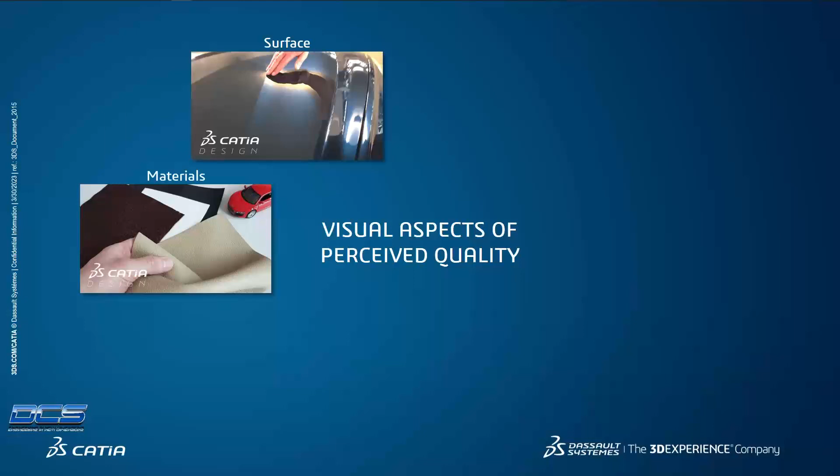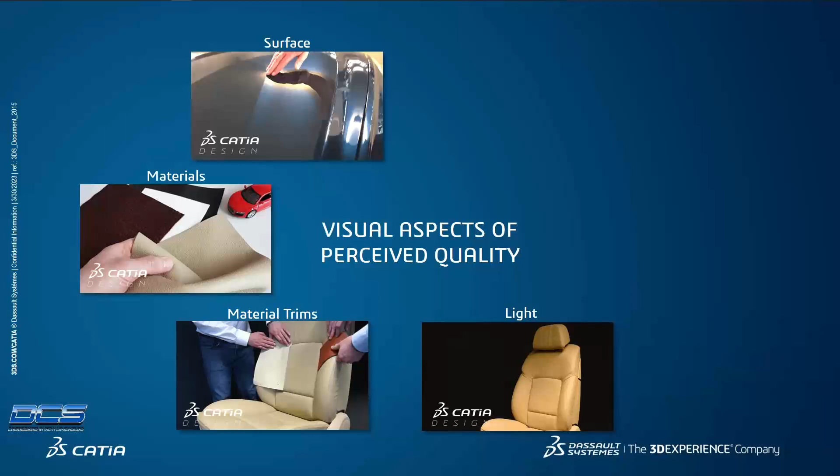The next factor is something, as you can see here, or probably you cannot see since it's all black, is light. With light, we as humans can see basically everything, like the surface and the materials. It also has a huge effect on the material appearance, so we will see later how that looks like.

And for sure, what we are talking about mostly today is gap and flush. As a designer, engineer, or stylist, you have a design intent, and the gap is a part of the design intent because you have to manufacture it, right? So that is also a very important part, which is in real life quite easy to investigate.

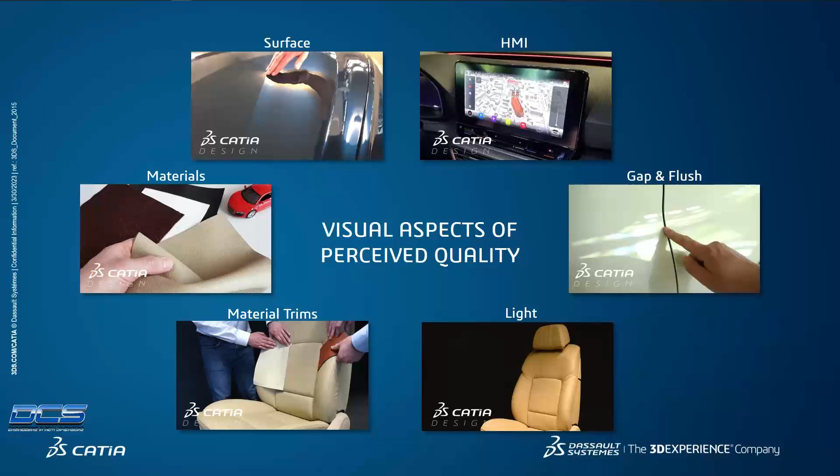A very new topic, or let's say one that becomes more and more interesting in today's cars, are HMIs, so-called human-machine interfaces—basically all our displays. They have two effects at the same time. They emit light, so they might change your appearance in the interior, and you can interact with HMIs, with the display itself. So there are two factors why they affect the perceived quality of your product.

Now comes the question: when do we want to make a perceived quality review? To answer that, we have to take a look at this generic product lifecycle template from design to mass production. Historically, perceived quality validations could only be performed on a physical prototype, and until that, there was no chance to do these things. So in design, style release, or technical release, there was no chance to enhance or do a perceived quality review. You might have done that first on your prototype, on your physical prototype, and you could be struggling to identify issues for the upcoming production.

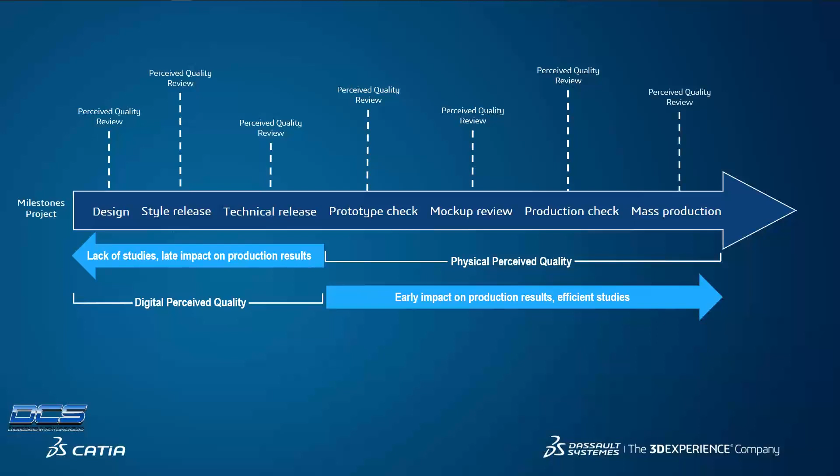But when you introduce a digital tool to review and make perceived quality reviews, then we can really find issues earlier, and these could affect all the later steps positively—we have a good impact and find issues earlier. That is quite good. So basically, that is also the answer to the question: when do we want to do a perceived quality review? We want to do it all along the process.

Within the 3D Experience platform, we are offering a solution to do this. We offer our designers all the tools to make a stunning design, we offer our engineers simulation tools to validate these designs or suggest new ideas, we offer collaboration tools to really collaborate between departments, and as I mentioned, since we want to experience perceived quality, we are offering experience tools on the 3D Experience platform.

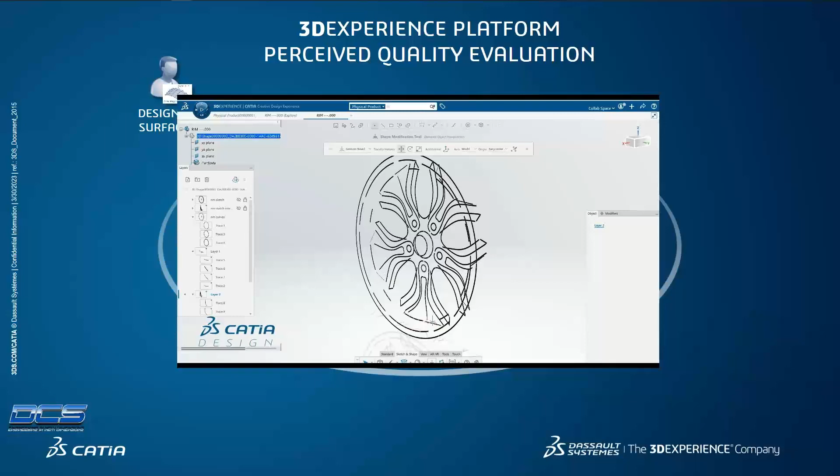Let me show you quickly to wrap up these things on the 3D Experience platform. We have tools for our creative designers to sketch and create surfaces out of that very easily in one tool. After you have the first surfaces, we can provide them to the next teams, the engineers or surface refinement teams, who then create the real Class A surfaces.

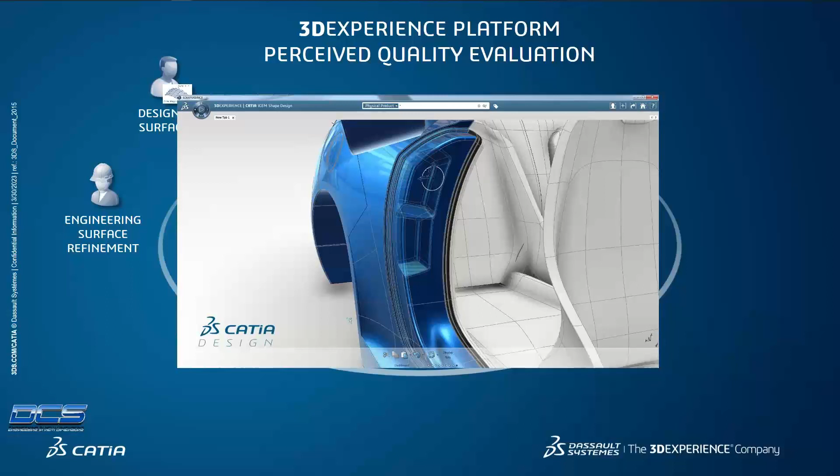Which you can use later on in the process for production. Until that point, we are just having surfaces, and surfaces is just one part. I told you that experience is very important for that. With the Visual Experience Designer and the embedded application CATIA Live Rendering, we are enabling high-end visualization on your managed CAD data.

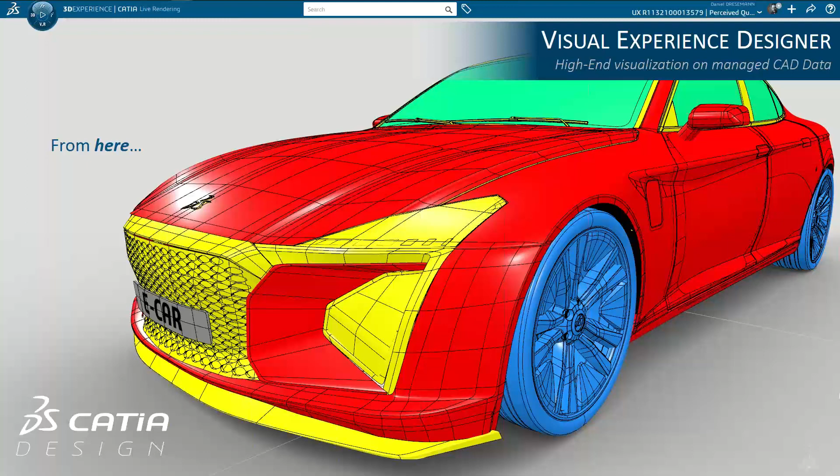So from here, we can go to here - that is a 3DEXPERIENCE. We have proper lights, proper materials, and a realistic environment around that, with really good and powerful render technology based on our Stellar renderer. Here you can see a picture done with the technology of global illumination.

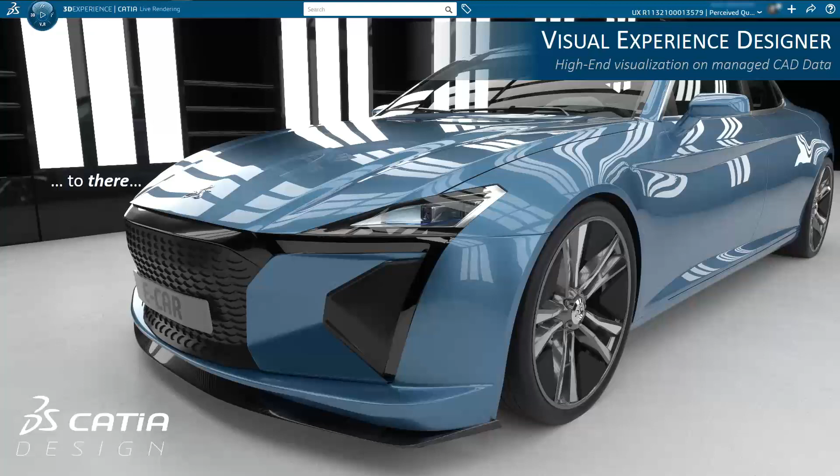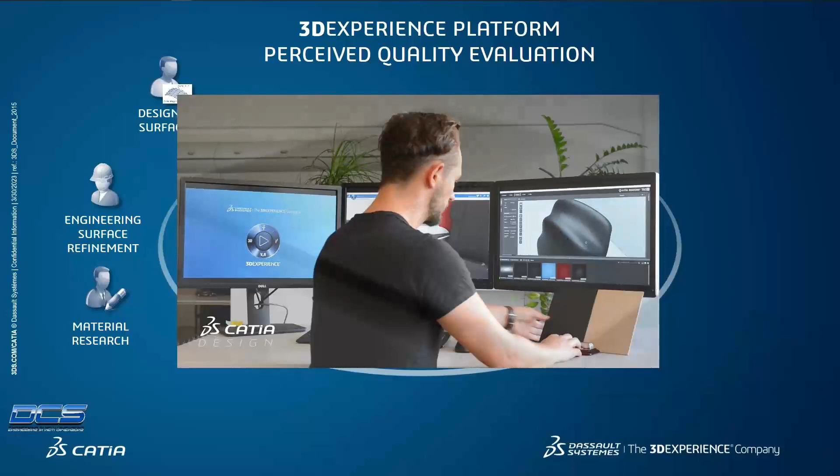So to get there, we have to make kind of a material research. For that, we can use real-life materials, scan them with our technology partner X-Rite, and they can produce a really physically correct scan, which we can then apply to the surface, and validate these results virtually based on our Stellar physically correct renderer.

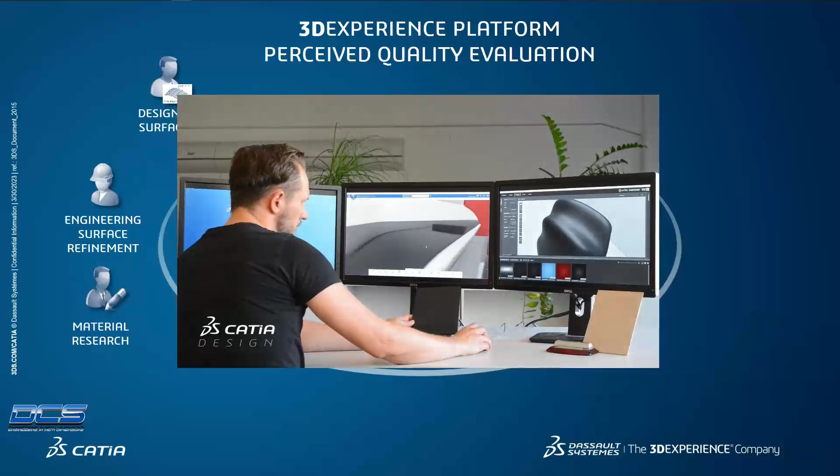So we have still the same connection here. For sure, what we can also do is, in the material research part, we can also visualize procedural materials like substances.

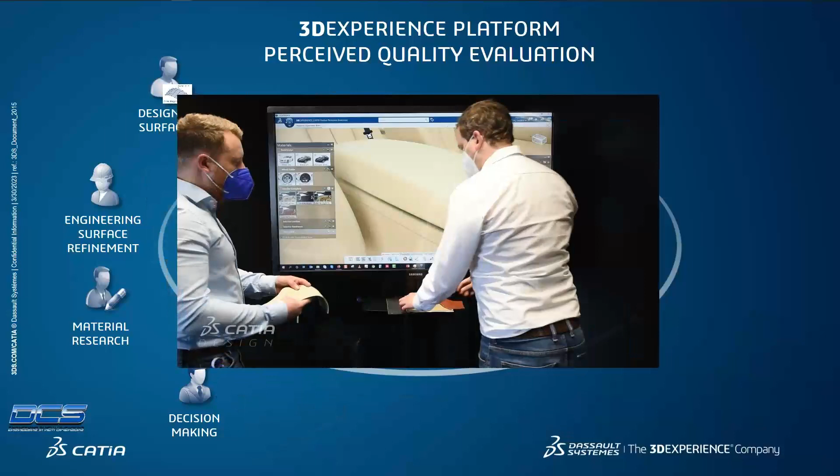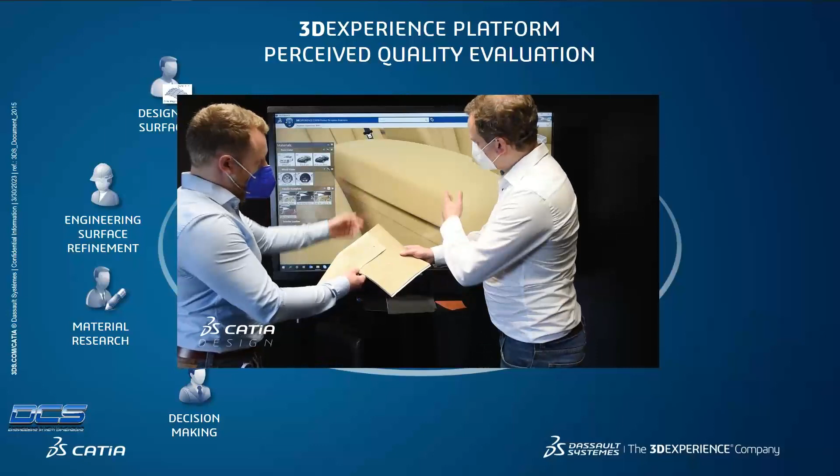That leads me to the part that we have now a few materials available, so now we need to make a decision. If you remember the example from before, on our real life example, we tried to put our reference materials here in real life on our product. We had just small patches, and now we can really put them on the whole product and really evaluate and make decisions easier.

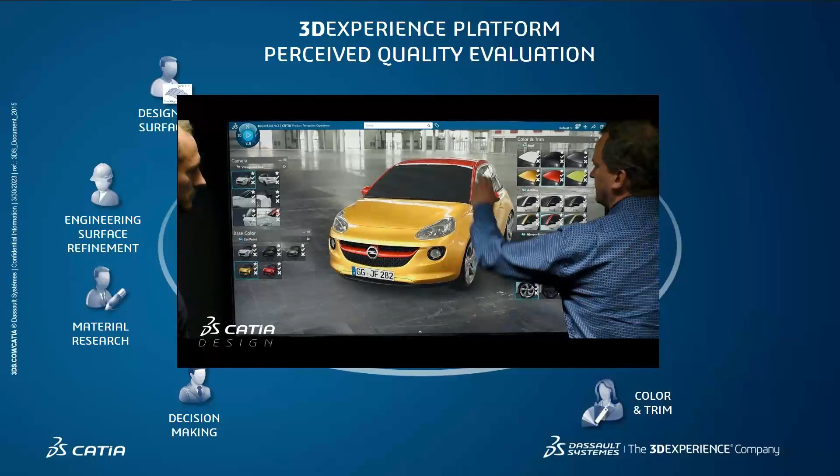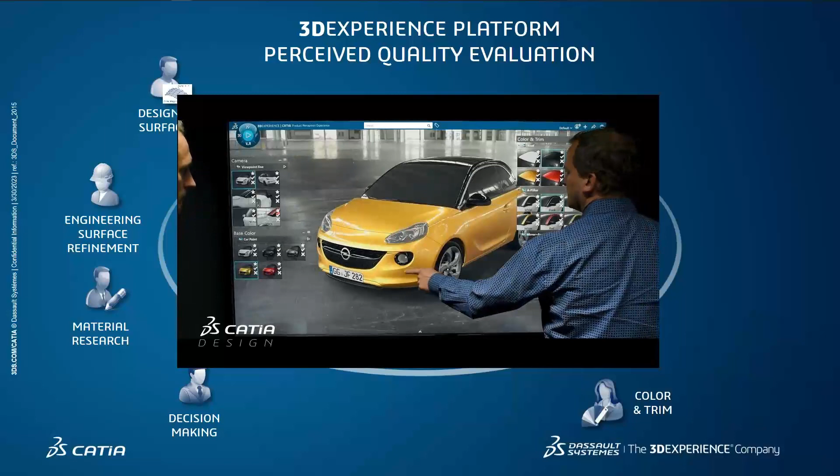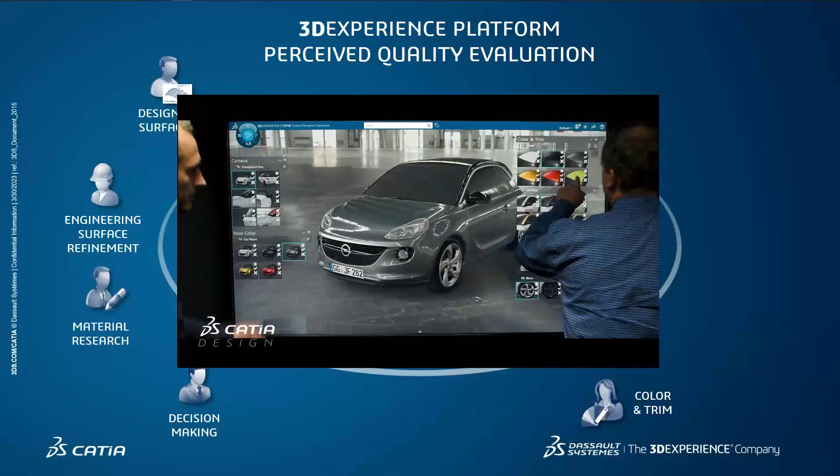When we have done this part, we gather all the other materials, 3D surfaces, materials, and environment variants, and put them together in a tool called Product Perception Experience, which enables us in a very intuitive way to try different trims and packages. So you can see we can collaborate together on the same data, talk about different trims, and save them for later reviews.

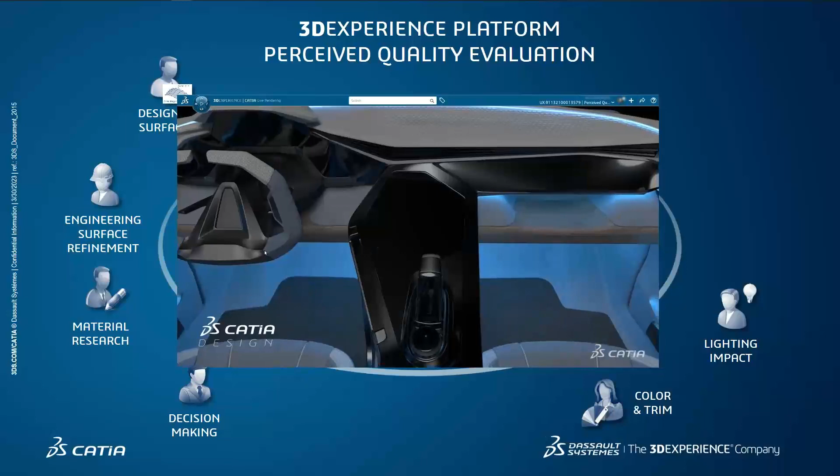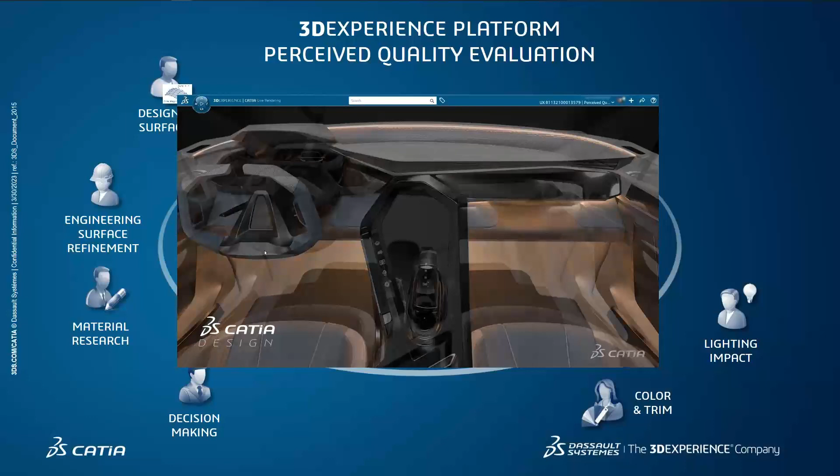I mentioned before the light factor is a very critical one. As you see here, when the mood light changes, the material appearance also changes on the product. That's not only true for interior light, it's also true for exterior light, meaning all our ambiences, whether there's sun, a night session, rainy weather, or whatever - everything affects our visual perceived quality here.

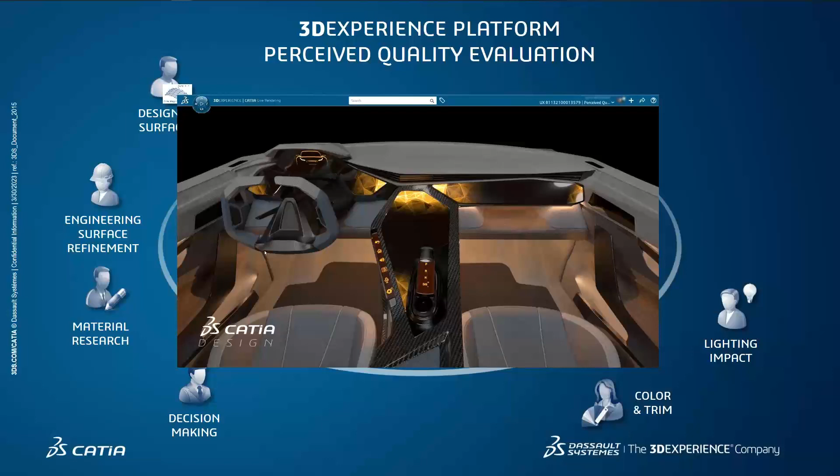Another very important factor is these displays you can see now here. These are also getting more and more space in our interior designs, and they can also affect, with the light they emit, the visual appearance of our interior.

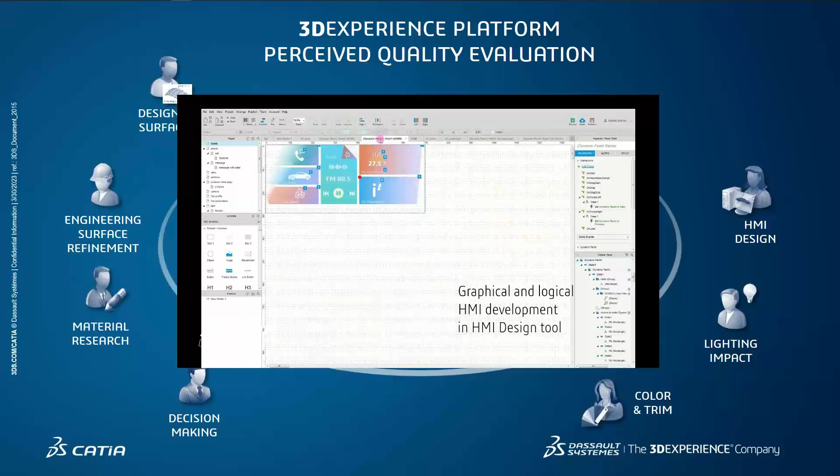But that is not the only thing - there's also the interaction. You have an HMI designer prototyping in their dedicated tool an HMI interface, or more or less the content of a display. As you can see here, it is an HTML page.

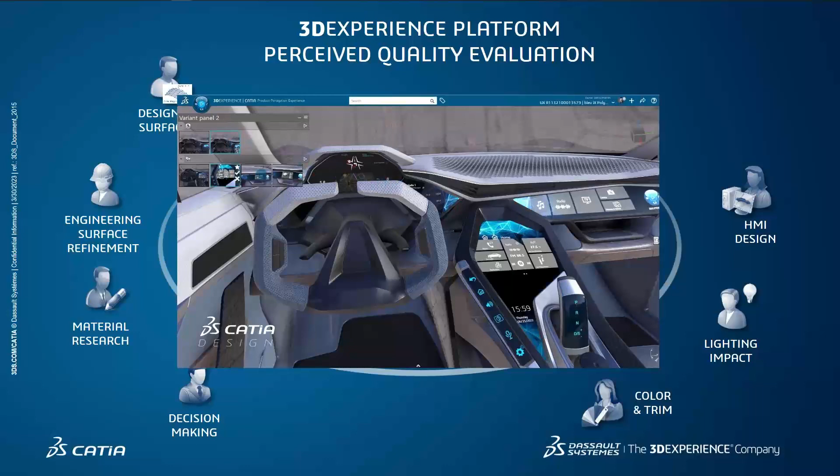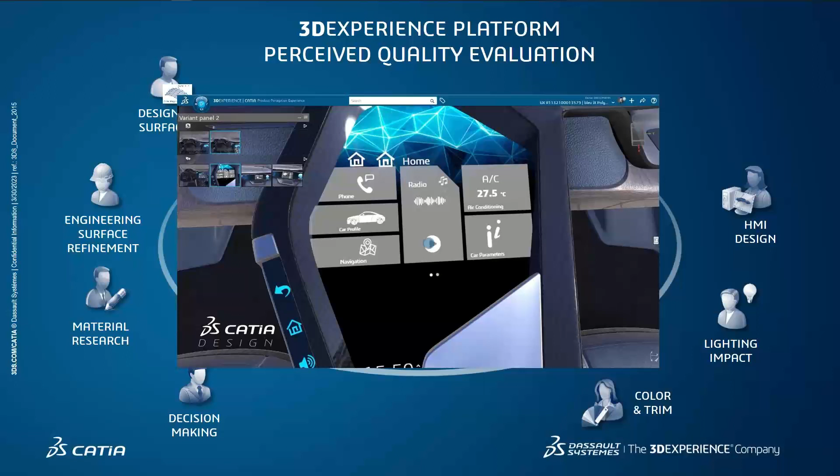We can interact in there, and now we can also include that in our whole 3D scene, meaning we have the proper lights again, the materials around it, and you really can get the feeling of whether the whole content of your HMI fits into your product and its context. You can also interact with it in 3D, which gives us a quite complete check for our perceived quality review here.

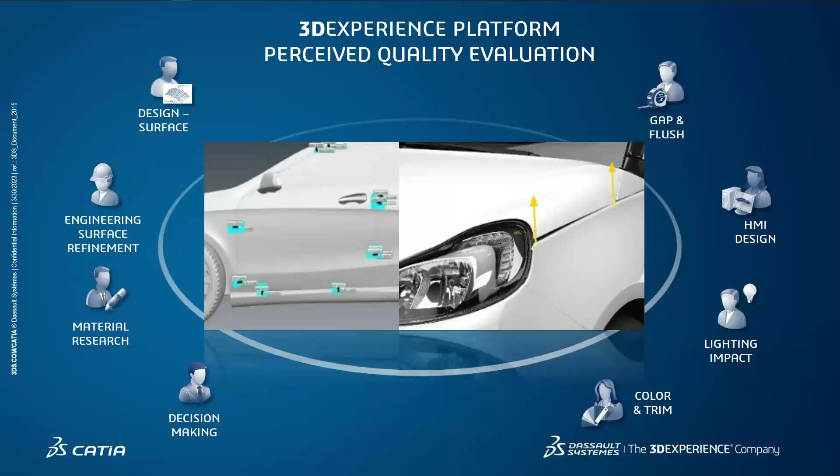As a last step, and now I want to really focus on Gap and Flush, because this talk is about Gap and Flush - that was more or less an introduction.

We are coming to the part where collaboration is really mandatory. This might be the first time where designers, engineers, manufacturing, planning people, and simulation departments come together and meet in front of the car to discuss it. On the left, the designers had an intent for the surface and material, but as soon as it comes to manufacturing, there has to be a gap because it could not be built in one part. Now the gap is part of the design intent. Another good example is on the right, where multiple materials come together and have to be separated by the gap. So again, the gap becomes part of this material split and the designer's material intention.

In the following, I have some more examples where we can see how different materials can affect the visual appearance of a gap. There might be a color where the gap appears more noticeable, and other colors where it appears less noticeable.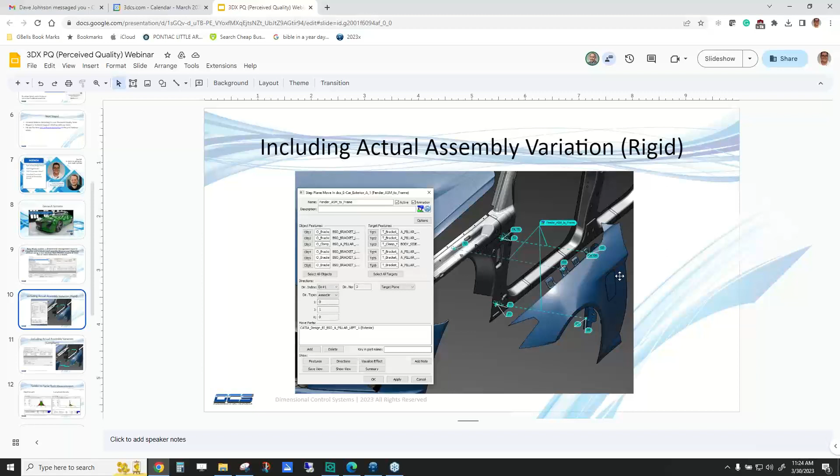But when you do something like that, you're going to get a lot of variation up front. And we know that fenders are flexible and have more than just a 3-2-1 locating system. So then we enhance the software with Compliant Modeler, which allows you to over constrain the part. You'll have your original 3-2-1 locators, and then you can clamp it and attach it at additional locators here.

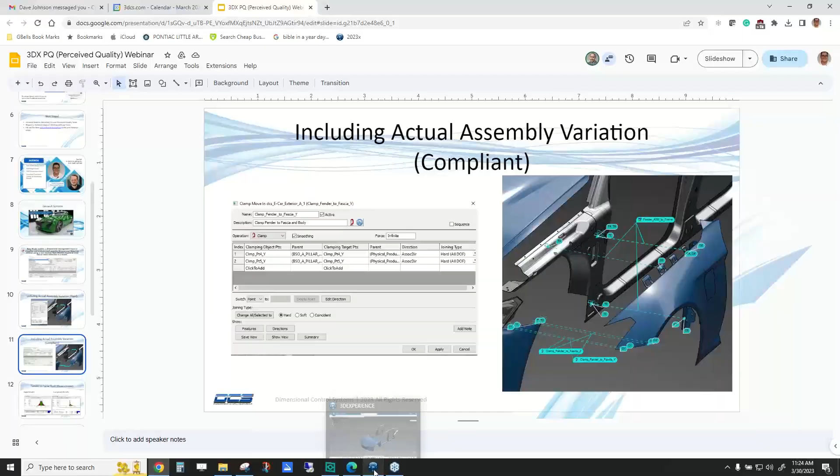So if I jump over to 3D Experience, this is a minimized version of the model. As I mentioned, you can see this model has moves in it and it has tolerances in it, but we're not going to talk about that. We're going to just talk about measurements.

So here you can see I'm measuring the Y variation, Z variation at the fender, and I'm measuring the traditional gap between the fender and the hood. You can have any of the measurements that you write around the vehicle.

And once those measurements are written, if I go into this measurement here, this is the spec limit. This is what we're trying to validate from a full model - that the design is 3 millimeters. We want to know if it varies within plus or minus 1, is that good enough? Will it look good enough? Is this what we want to accept as our spec limit, so that we can then finish the design, analyze it, and see if we can meet that spec?

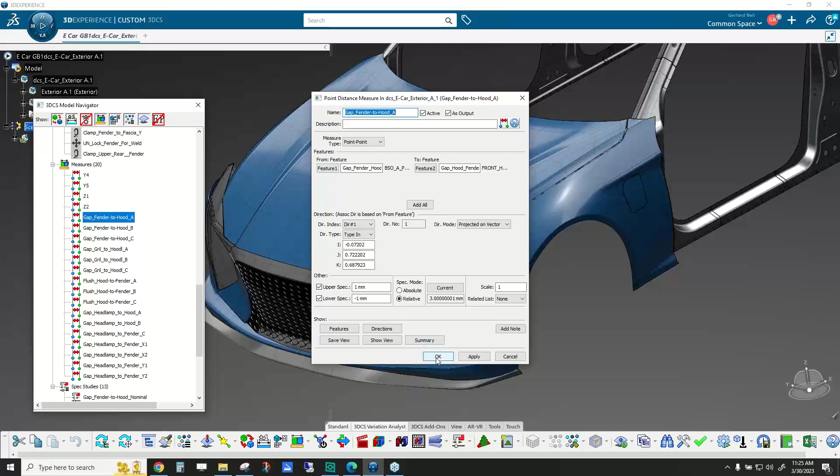So with that, you would then write spec studies. And if I go into a spec study here, this allows you to pick any of your measurements and put them down in this list. This is a gap fender to hood minimum. So you can see the nominal is 3 millimeters, and we want to see what it looks like at the lower spec limit, which is going to be 2 millimeters.

And you can either set it to your lower spec limit, your upper spec limit, nominal, or specify any value. As I click through here, you can see, okay, this is a fender gap max, so now it's set to the upper spec limit, and we want to push the gap to 4 millimeters. All of these over here are spec studies, and you can have an A gap and a V gap.

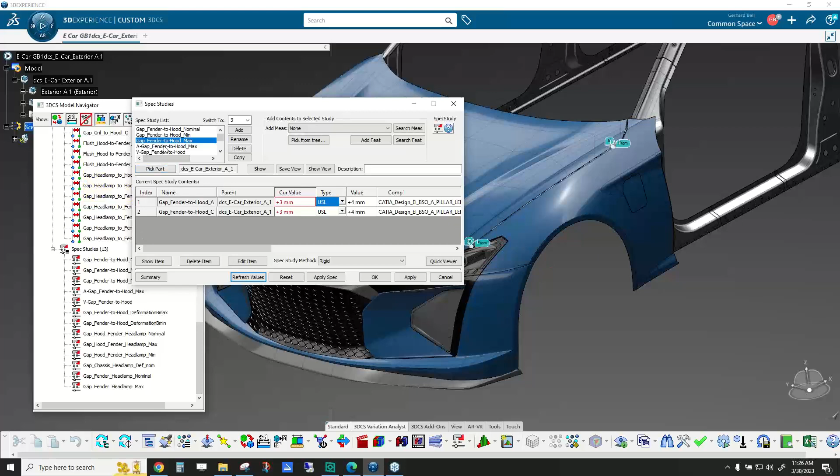And once you have all these spec studies, if I zoom in here and go to Quick Viewer, I can just come here and click through, and you can see the gap is opening, the gap is closing. This is an A gap. This is a V gap.

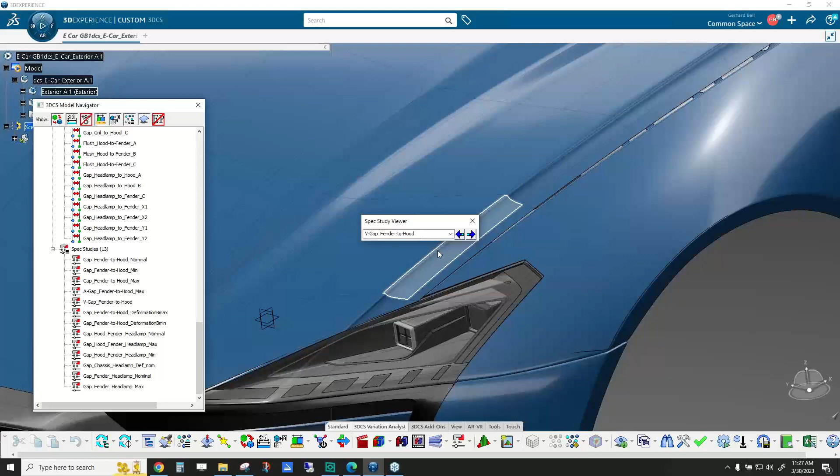So you can quickly pass through any of your settings here to get a visual. And then there's more spec studies in here where you can see this is gap fender to hood deformation, where we opened up the gap in the middle and we closed the gap at the end. And so the idea is...

Without the design being complete, you can put these panels into any position and visually look at it and say yes or no, to establish the confirmation of what your actual measurement specs should be.

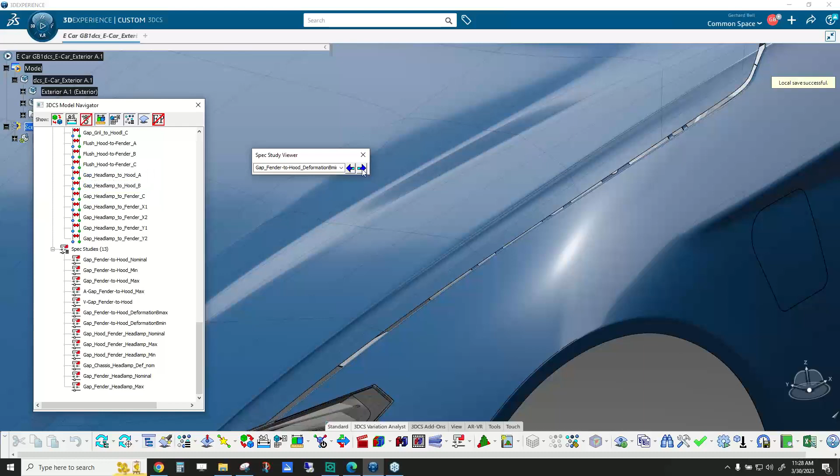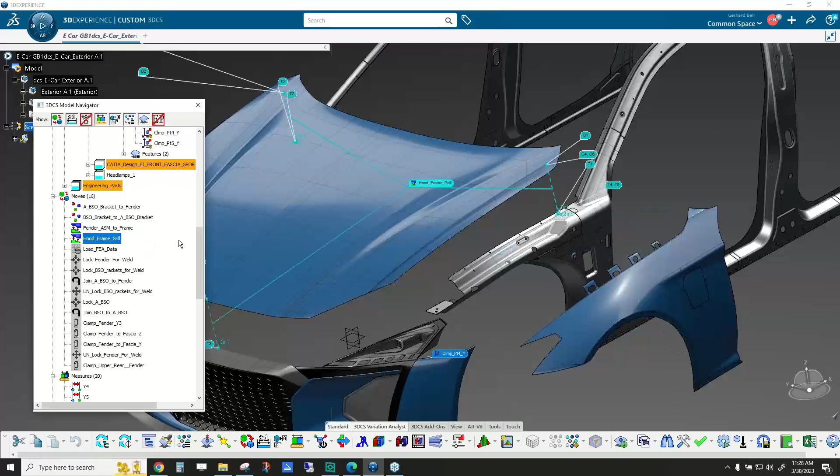Once those measurement specs are set, I can now separate this model, because this does have moves to define it, and there's that 3-2-1 move that was locating the fender. Of course, there's a move for the hood as well. Then I can go ahead and build this and deviate it.

So now we can pick up the variation from the actual part tolerances and the build specifications. This is a rigid body model. So if I go ahead and build this, we're going to look at this Y variation up here on the fender, and if I run a quick analysis...

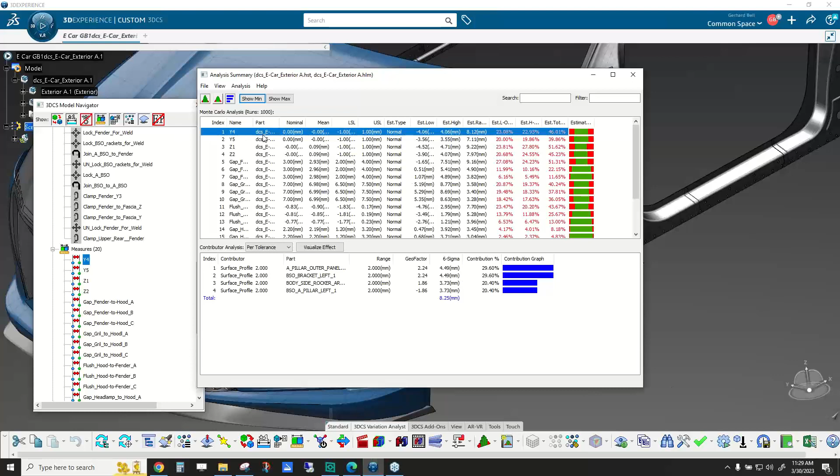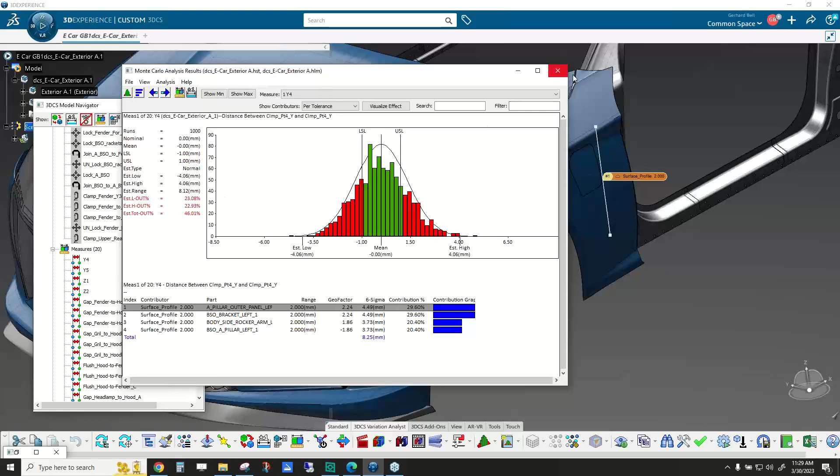And we look at that measurement, so you can see locating this fender based on points back here and one point in the middle. I'm projecting out, I have a high geofactor, and that fascia, or the fender to fascia fit, is quite bad - 8.12 millimeters. So we can have a single model set with multiple settings.

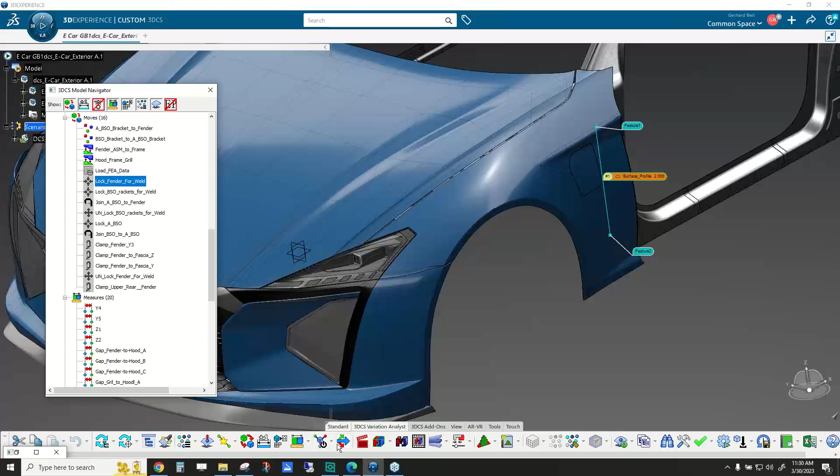Here's the compliant modeler. In the compliant modeler, you have to load some FEA data so we know how this part's going to deform according to its material properties and where it's all attached. And if I use our model variants, I can just quickly say, hey, I want to switch this over to a compliant model by applying this model variant. Now you can see it automatically turned all these moves on. And because this is a compliant model, we have to - let me separate this real quick.

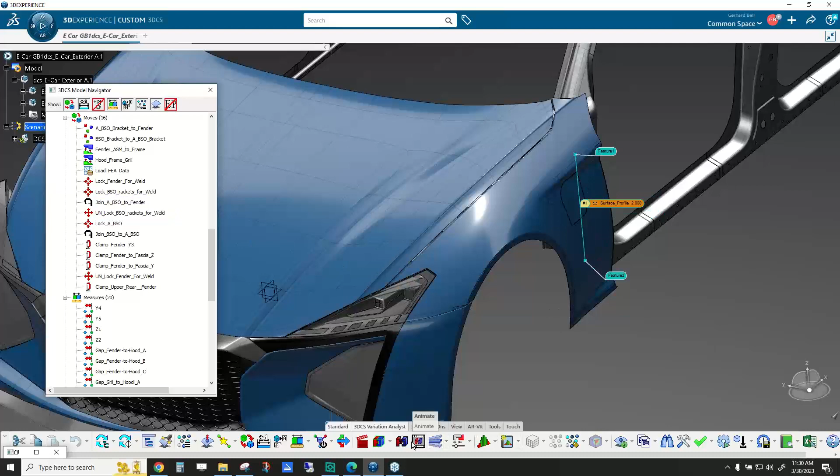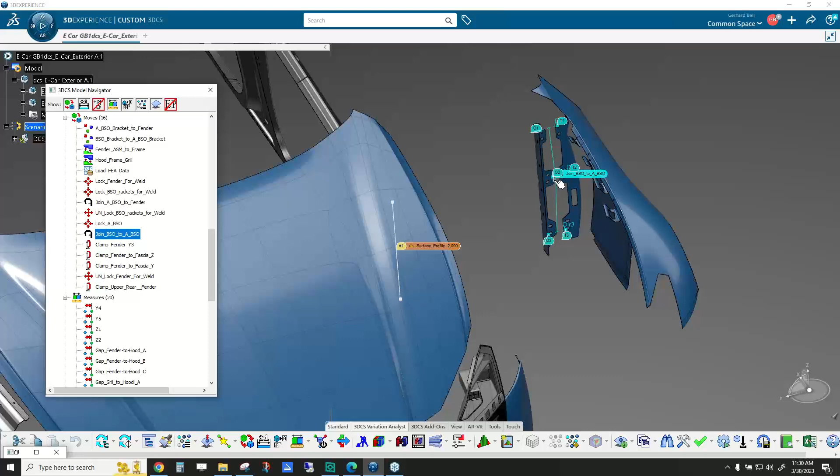We have some components here that are also compliant. So we have a little more work to do because we have to join these parts together and then join those parts to this part so that the stiffness of all three becomes one. That's what these extra moves are, where we're holding the part so we can weld this piece to this piece. And here we're welding these two pieces together. Now the stiffness of all three of those are combined.

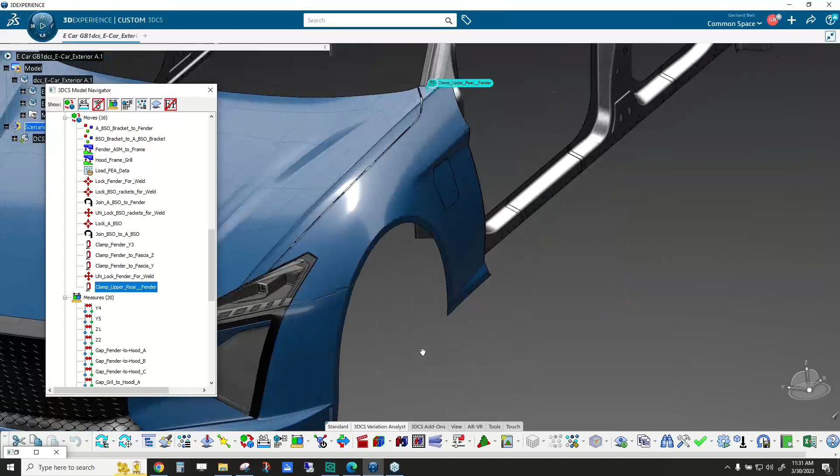And then I can start clamping at all of the attachment points. We even simulated an attachment point up there. So with that, if I build this and zoom in here, just watch this corner when I hit deviate. It's a little slow, but this corner is twisting in and out as I'm clamping the fender up here. So forces up here are being projected in here, and you can see how it's deforming the fender.

If I go ahead and run this, this is going to take a little bit longer than the rigid body. A little bit longer.

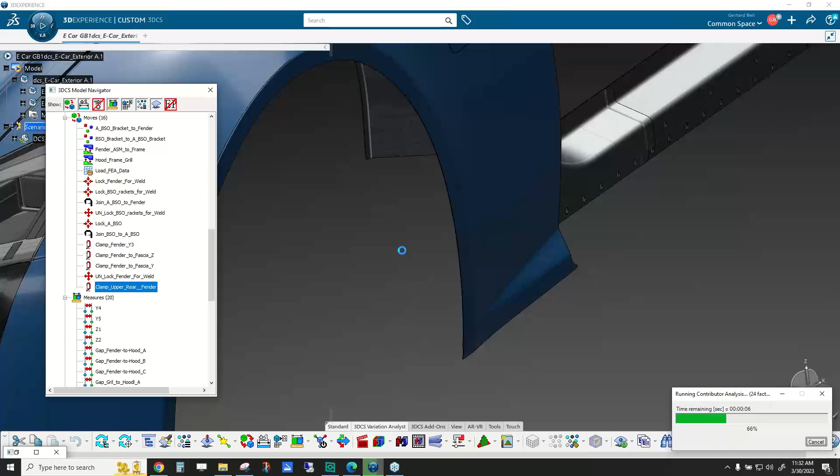Now if I go back to that Y measurement, fender to fascia, you can see it's zero because we clamped it back to the fascia. So we can take a model and analyze it from a rigid body standpoint. We can analyze it from a compliant standpoint, over-constrained parts. And we can put the visualization on it and see how this is going to look in real life with the variation.

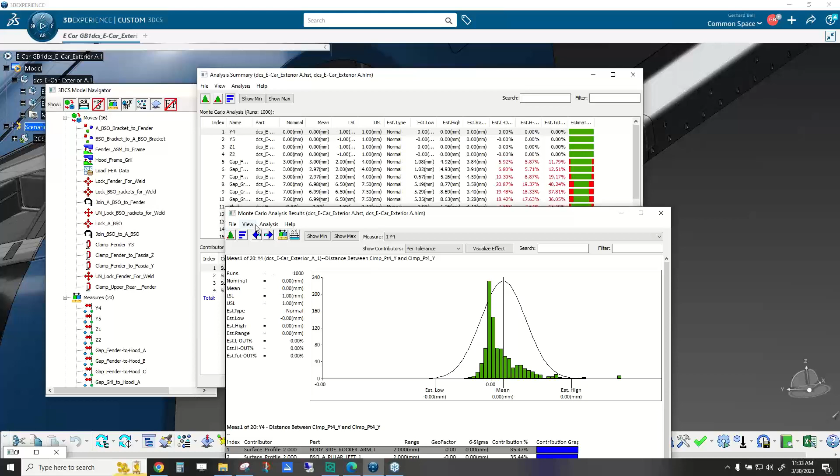So Daniel's going to show you that if I go back into one of these spec studies.

You can set your spec study to its nominal design gap, its upper and lower specifications, or if you run the analysis, then you set it to the specified amount. What did the analysis tell you? That way you can look at your design and say, okay, this is what we're going to get from our assembly method and our component part tolerances. What does it look like? Is it acceptable? Is it not acceptable?

And that's where Daniel's going to go back and show you the variation with the advanced visualization. And with that, I will hand it back to Daniel.

Thanks, Gary. Let me switch on my camera here again so that you can see me. Ben, do you want to do one of those polls, or should I go through that and show my screen?

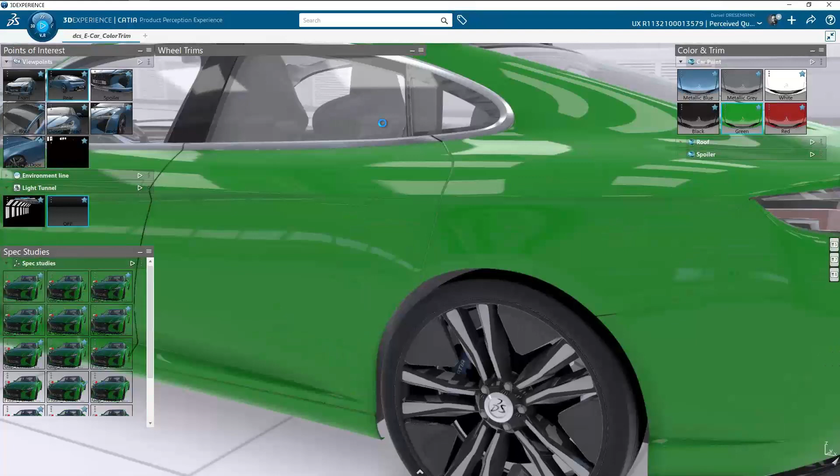So for example, you can switch colors here quite easily. You can look at the spec studies here, what we are doing right now. You have predefined cameras, like I mentioned before, and we are here in the CATIA product perception experience application. So just that you know in which application we are at the moment.

Let's directly jump into the topic of spec studies and show some spec studies. So here we are, I have highlighted a few. There are all spec studies from Gary in here, I'm just able to import that. But to get a little bit better overview, I'm showing some of my favorite spec studies to get you the best feedback here.

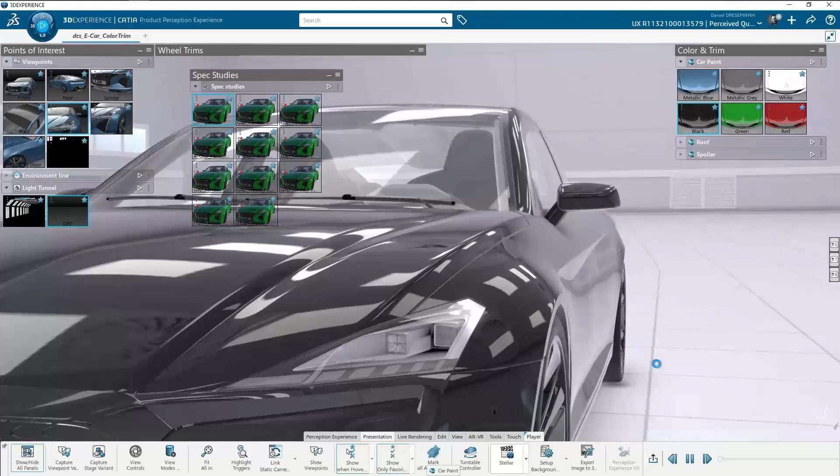You already see that is our real-time visualization, which is already quite good. But in terms of reflections and shadow calculation, we need to switch on our global illumination renderer, which is here, Stellar. That is now active.

And we still have the capability to move a little bit. You see that the performance has reduced a bit, but it's still quite nice. That's because what I'm using right now is our little cluster running with our distributed Stellar commands. So Stellar is not only running locally, it is also running over the network.

And the cool thing is you can linearly scale this technology up. So we're using 8 graphic cards at the same time right now, and you can use 16, 64, up to 4,000 graphic cards. Then you really have more or less a real-time global illumination review, which helps elevate this process better.

So now you really get the idea that we have different reflections. We can zoom in here a little bit. Just let's zoom in on this one, to get a bit better view of the reflections here from the lamps on top of our environment. A little bit to that side, nice.

Okay, that's better. So that is now our nominal build situation, and let's enable, for example, first maximum. So that's really a subtle and light movement. As we have seen in Gary's presentation, these movements are very, very little. But as a designer, I don't want a lot of changes, right? So this should be checked quite easily.

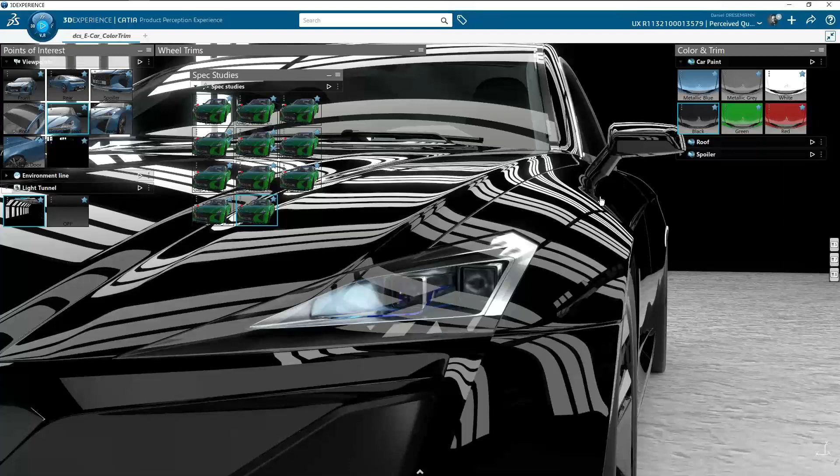But let's change the environment very quickly here. We have a kind of light tunnel, which gives us a bit more reflections and more information about where these reflection changes have an impact. Let's zoom and navigate around that, and now look from a different angle on these parts. So now we can really see nice reflections, these reflection lines and highlight lines.

So this is how it should look basically. Let's turn it around a little bit so we can see it, and let's have a look again at this spec study and really see the difference, what happens here in the front and also here in the back.

Still, these movements are very subtle, and from the spec studies we can mention them. These are still, in terms of reflections, good, so we can flag them for now. But we keep them open and go back to the default value here.

First of all, we want to see how the rigid movements are working. Gary already showed that these are probably not very good, but let's have a look here also in terms of visualization.

What effects does this have? We really see a lot of changes in the reflection, a lot of movements from the fender, something which is really not working from the designer's perspective. The cool thing is you can sit together as a designer and engineer and talk about the same understanding, visually seeing the impact of these changes. So I think we can agree the rigid spec studies are not the ones we are really interested in.

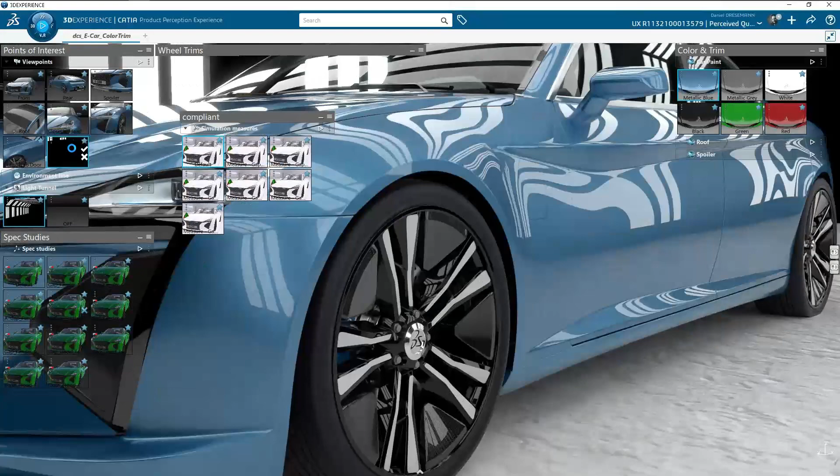Let's take this metallic color, for example, in the first place, and have a look here with a predefined camera, which is cool because I already took a look at a specific highlight I want to draw your attention to, which is here at the place where this little opening for the charger is. So let's have a look how the compliant model has an effect.

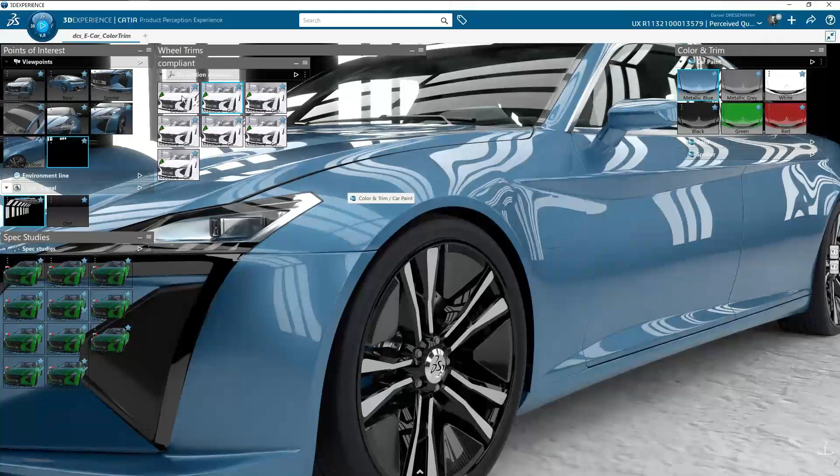This is actually here, probably we will move that up a little bit so you can see also the gap. It's a little bit better like this. But you see that we really have a difference here, and this is the key point where we really see the difference in terms of reflections.

We have reflection changes. As Gary mentioned, we also have a flush measurement now we need to take care of at the bottom of this fender. We also see other materials looking through here, which means we really need another, better solution for our assembly process. But this looks good because we fixed these two measurements between the fender and the fascia.

But if we take a look here at these results, we see that we have to put a little more work into our solution to find the best approach for the assembly process of this fender. And that, in my mind, is how perceived quality, visual perceived quality, can help you see the difference faster and easier, because you really have extreme reflection changes on your fender.

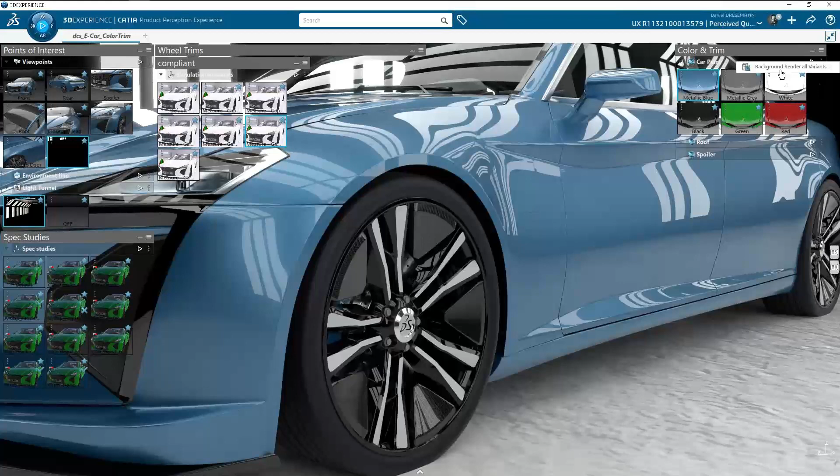What you can do as well, just to show quickly, is, for example, if you find a certain gap you want to show to your colleagues in all these six colors, we can use our so-called background render all variants. Click on that and just click OK.

So in the background now the rendering will be processed while I show you something else, and that will pop up in a second. In the meantime, after it has finished, I can show you these nice pictures from that view, and you can share them. You can see right away the software is going through all the colors now.

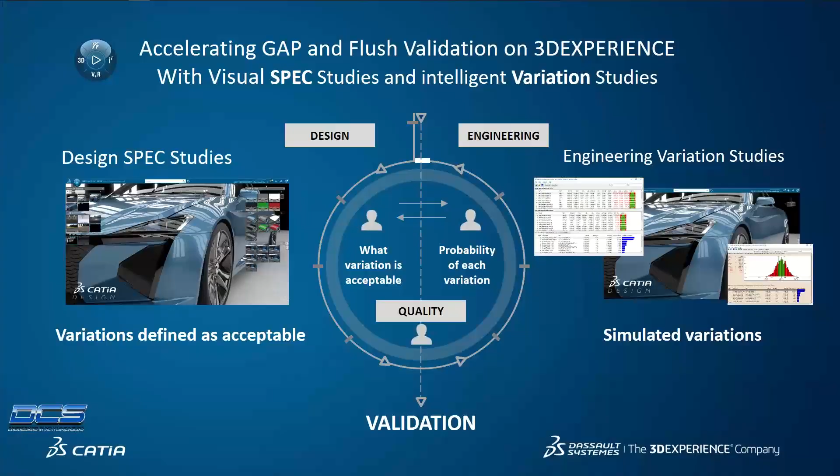And rendering it basically. So coming back to these things here, let me just jump through this one—oh sorry, jumped too far. I want to show you this: you not only can do this by yourself, preparing everything, because I wanted to really show you the high-end quality here.

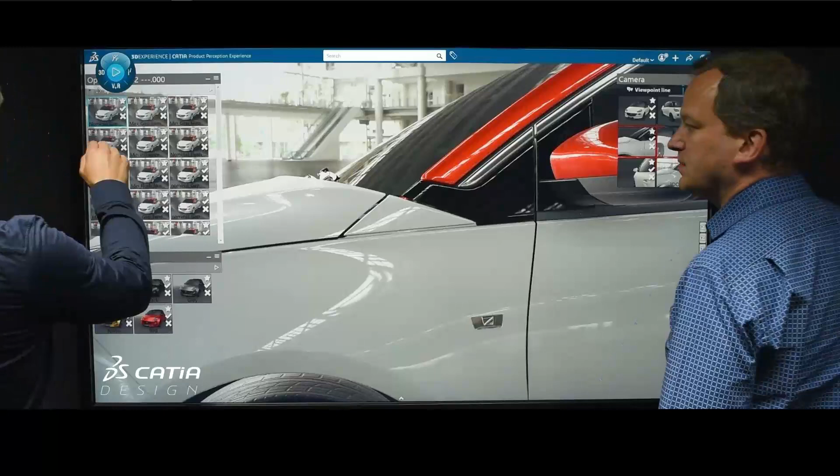And what you really can do is collaborate on the same tool I've just used. In this case, with another example, another car, you can really talk about the same gaps and flushes you've provided, and then show the spec studies to your colleagues in different colors and see the difference in your variations.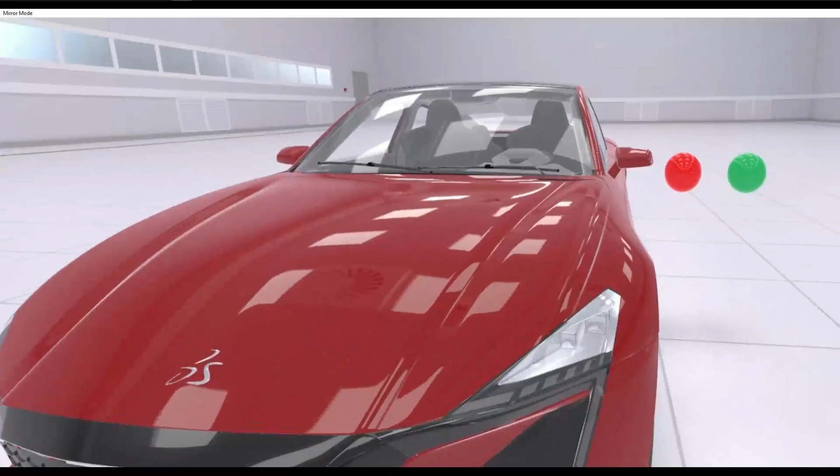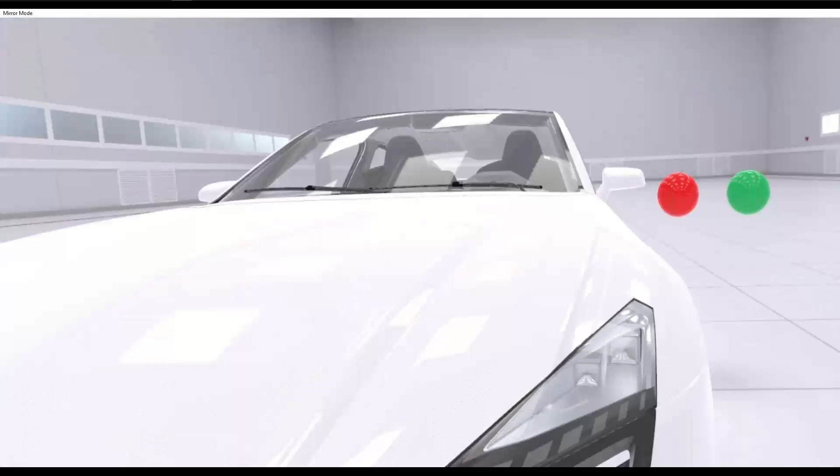Another very cool thing is you can also do a collaboration here by using our VR capabilities. You can see me here in the bottom left corner, where I take a first look at a 1-to-1 scale of this model. I can change all the colors, and wearing the headset gives me the opportunity to imagine what this whole car is. I can really see the difference of the spec studies in this first place. I've put a trigger for the spec studies on the red sphere, and on the green sphere I put a trigger for the compliant modeler results. So that is really another benefit you can do in the 3D Experience platform.

Let me see if the results are already finished. You can see now that the rendering is almost done.